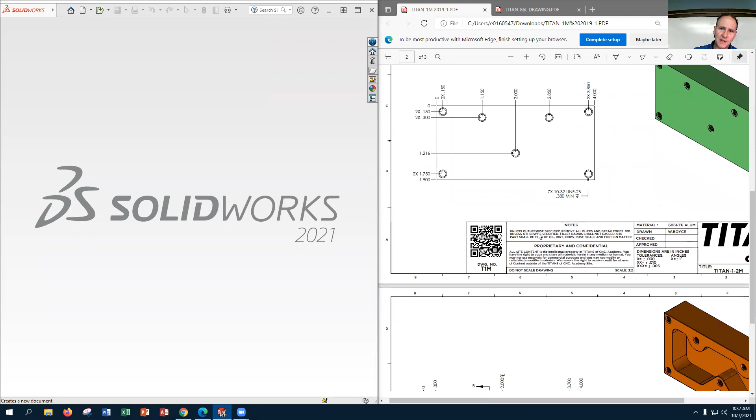Okay, this video is to demonstrate the Titan 1M milled part. There's a 3-page PDF here that we need to go through in order to complete the part. And what we'll do is we'll start with an inch part. Make sure you're in ANSI units. If you're not, you can always go up to the gear wheel here in options, document properties, and make sure everything is set to ANSI.

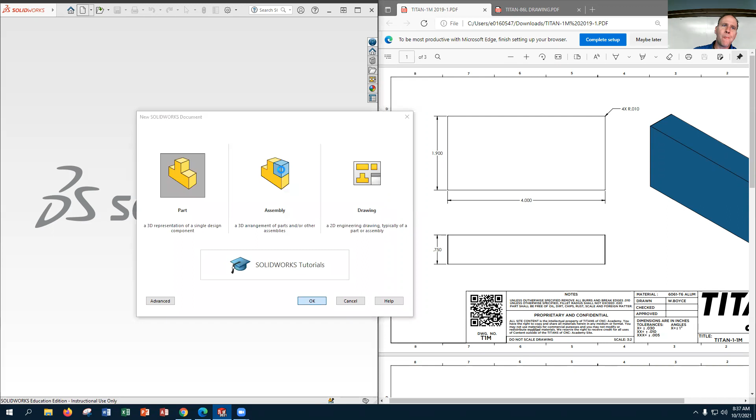So I'm going to open up a part, verify the units are in inches. Down here in the bottom, we've got inches. And looking at this part, isometric view, it looks like they chose a view that was started on the front plane. And before I do that, I'm going to set the material so I don't forget. So I see here in the title block, they have here

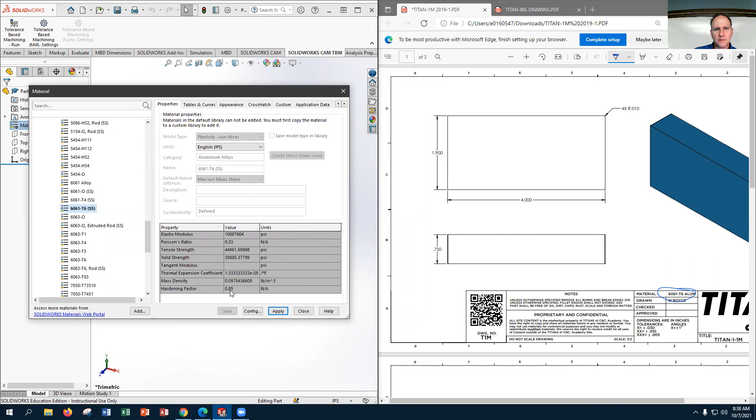6061 aluminum. So we'll go to our aluminum alloys, right clicking on material, going into edit materials. Now we'll scroll down here to 6061 T6. And the SS is just a bonus for us. So we'll say apply, close, and we can get started.

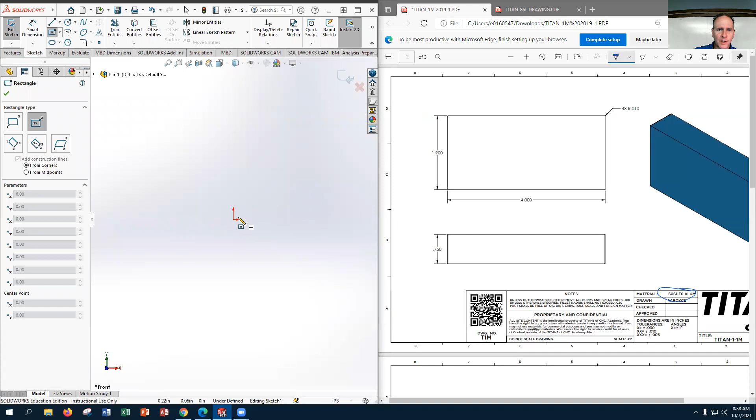We'll start on that front plane. And not caring where the origin is, other than it probably would be at a corner or in the center. It might be helpful to put it in the center. So I'll choose a center rectangle up here, right there. And we'll just sketch a rectangle starting on the center, right on the origin. That way we're set up for that. Put our 4 by 1.9.

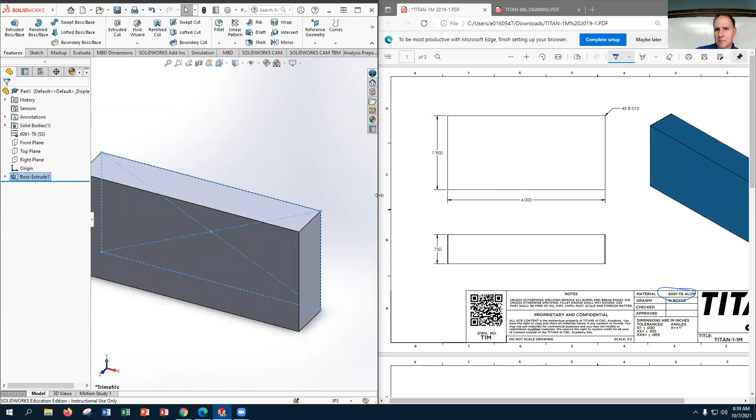I'm going to ignore that fillet until last, the R.010, because it's usually best to do fillets last on most models. So not only last, but we usually do them largest to smallest. Scrolling down, we can see basically we're talking about just all the tapped holes here. And we know they're tapped because this little note right here, it's a number 10, 32 threads per inch tapped hole. There are 7 of them. This just means that they're fine thread, and this means that they're internal threads. But it does say the depth here is .380 deep.

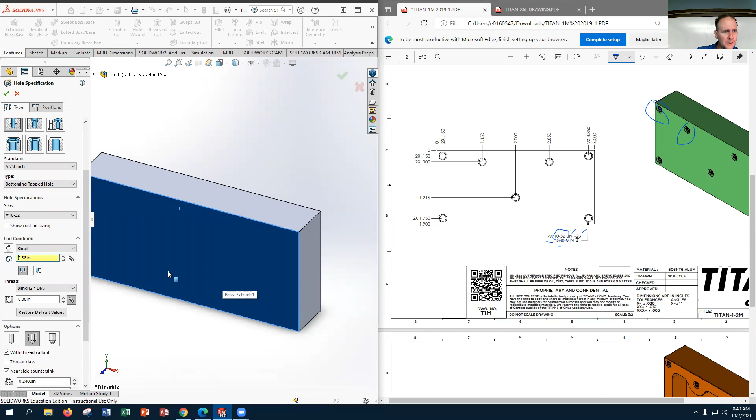So we're going to go ahead and pick this face first, go to Hole Wizard. If you ever don't choose the face first, make sure when you're in Hole Wizard, you do not pick the button that says 3D Sketch. This is our tap button in Hole Wizard once we're here. And we're going to go to a tapped hole. Bottoming is fine, but we're going to go down to 10-32. Find that in our inch style. This is not through all. This is blind to a depth of, and this is for our thread depth, 0.38. And that should update. If we link in condition .38 for thread, yes, thread .38.

Okay, so we can hit positions tab. I'm going to go ahead and try to make ourselves normal to this. I usually use the space bar to do this, but then I'm just going to plink each of these out here roughly in their locations that they go. We'll fix them up in just a minute here. So we want some horizontal and vertical relations between these so that when I pick like these two, holding control and selecting them both, going to horizontal, they are going to stay horizontal with one another. Then I want to make like these two vertical and just kind of go around the bend here, do another horizontal and do one more vertical. This will help us require less dimensions.

So now I can put in some of the dimensions in just a minute, but I've got these two horizontal and this one needs to be vertical to that. Okay. All right. So one thing we can do now is go into our dimensioning, and as you notice, they did ordinate dimensioning. So I'll do the same thing. I'm going to do the verticals first. First thing I'm going to do is pull a 0 here and pick, and I've got all those set down, and I'm going to hit the check mark, and you'll notice that I missed one here. I did that intentionally, but I'm going to fix that in a minute. Just want to show you how to add one into our dimension set when we're done. Let me just double click each of these and set them to the correct values.

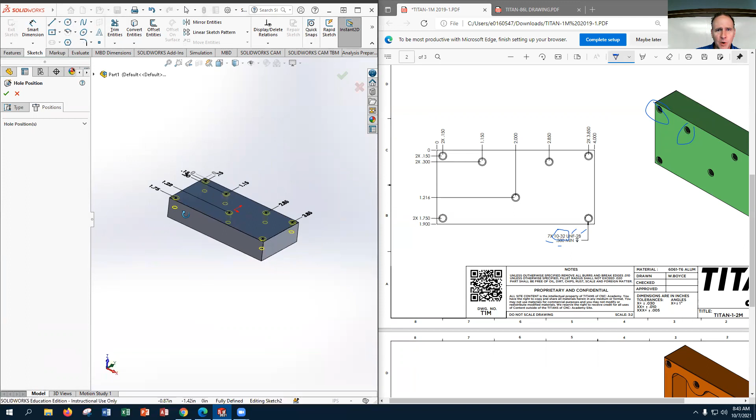Oh, that one's not needed. So I'm going to say cancel to it because it's already aligned to the origin. I had already put that in. Okay, so now I'm just going to double click each of these and set their sizes. And I'm just 1.15 and I hit the enter key. And over here 2.85, enter key, 3.85, enter key. And that's all done. So those are ready. There's our holes that are set up in this step.

And we'll hit the check mark and we can move on to the pocket creation down here, where we're going to do the internal pocket, this area here. And we're going to do the outside pocket, this area here. I'm going to do them in separate steps. So I'll pick this face again, start a sketch, get normal to that, and start to work on this pocket.

So the easiest thing I see about this shape is that, if you kind of look at it, there's a rectangle that's happening here with some changes to it, but basically it's offset of our outer perimeter. So if you just look at these two numbers, these are our offset numbers, 0.30. Easiest way to do that is pick that face while you're in the sketch and say offset and reverse it to the inside and then set the dimension to 0.3.

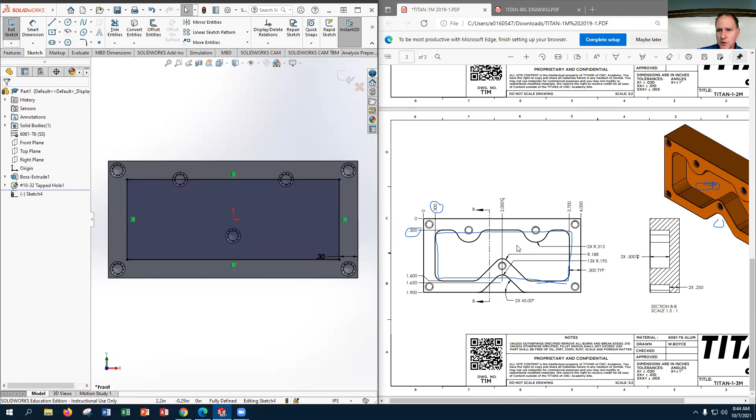Nice thing about this now is that we've got some of our construction already begun. We've basically got that and we've just got to add these bump outs. So I'll put a bump out here that looks sort of like this, and I'm going to do a tangent arc around the edge and back down. There's one of the bump outs, and I'm going to trim that with my power trim. And I'm going to do the other bump out. So the way I'm going to do that is just strike a circle from here to here, here to here. Pick these two, make them equal.

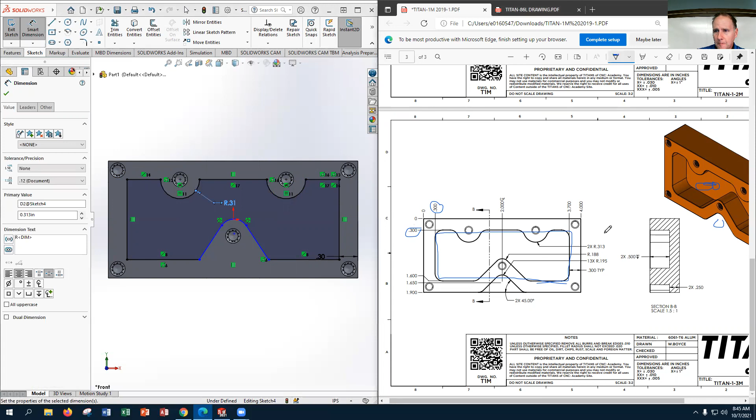I'm going to set a dimension for those then. Those are, well, those are radius. So let's trim first. That'll make it a little bit easier. Trim, trim, trim, trim. And we're going to go into our radius command. These are 0.313 I'm seeing over here. See where we got that from. Here. Okay, and then I see the 188 is also over there, so we'll set that on here.

Gets us closer. Notice our center fell off the map a little bit, so we're going to take him and align him vertically. And then we're going to put in a dimension to hopefully control the location on that. I think that it should be simple, but I'll just make these two lines equal. That'll help. And then we're going to make this angle by choosing that line and then this line, 45. So since they're equal, they're both 45.

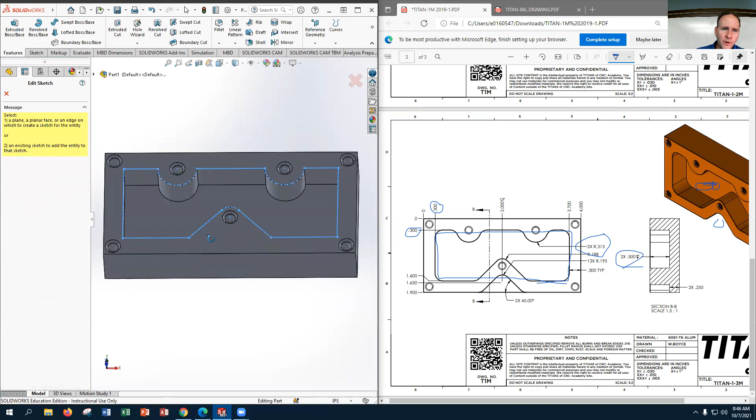And then this particular center point is controlled by just being on the center of that circle. And then everything's black. And that's perfect. That's what I wanted to get to. And we can cut this. And this cut is exactly a ½ inch deep as shown over there. There we go. Now I'm going to do the outside pocket, picking this face here, starting a new sketch.

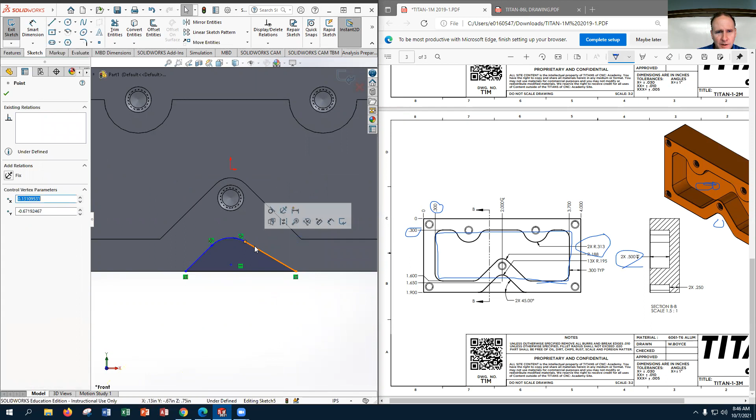This is basically a line, a curve, a tangent arc, another line, back down here, and across. Got a tangent on each of these intersections, so that's good. The size of this arc is going to be important, and that these two lines are equal is going to be important. They're equal, and they also need to be tangent to their partners out this way. So I'm going to set parallel, sorry. Set those to parallel. Make this one parallel. And then we'll set that size. This is 195, looking at the print over there. That dimension, and then we dimension the center from here all the way up to here, 1.65.

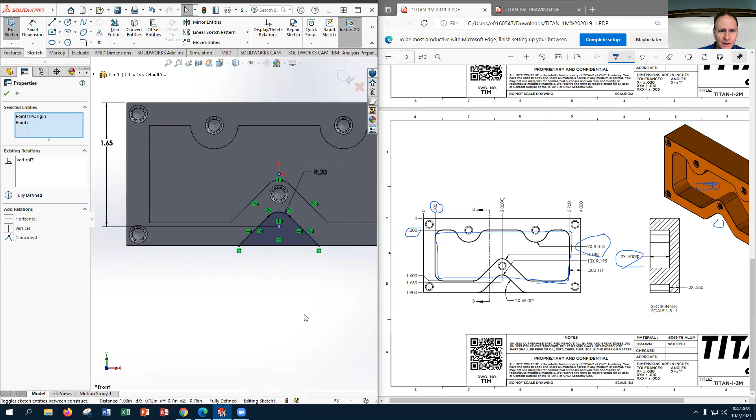Okay, why are we still blue? So we'll ask the question. So we grab onto something and drag it, and that answers it. We do not have a vertical relation set yet to anything that controls it. We can now cut. And this goes down to the same depth, a 1/2 inch. So let's say check. Basically, we have fillets left here at this point, a whole bunch of them. And these fillets are part of this set right here, this 13 by 195. That means all of these inside here are going to be that size.

So I'm going to go put that number in there, the 195, go fillet command, pick this one, see what it says if I go around. Oh, good. It wants to grab all those. That's nice. So the little pop-up menu allowed me to pick all these quickly. I didn't have to do that myself. I see there's 2 extras I want to add here. There's this one. This one. It should be 12 total to go with the other one I earlier had. And I'll say full preview.

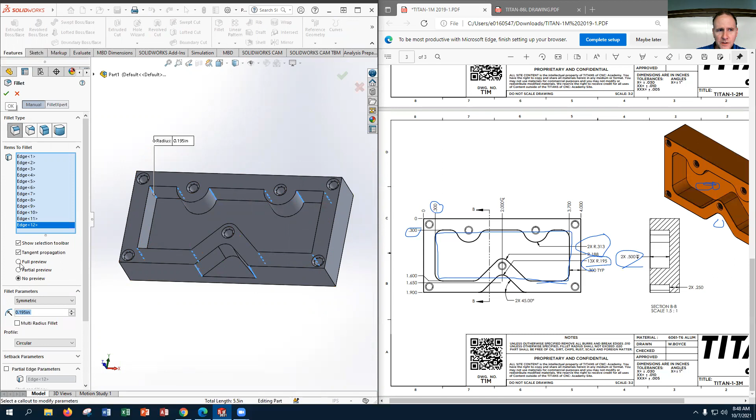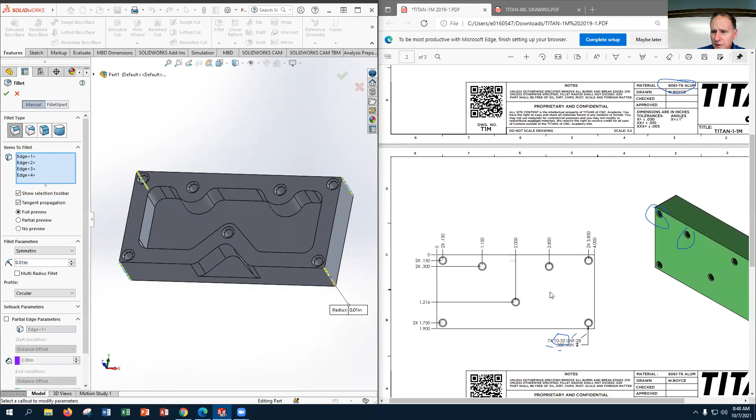Check. And the other 2 that we needed to add from the beginning, maybe we could do that now, the 0.01. So we'll do the fillet. We'll put in that number. We'll go right here. I'm also going to check to see if they want to provide the others. Yep. And if you look close, it's not really described in the dimensions, but they hit these edges here. So they hit this one and let it chase all the way around. And they hit this one and let it chase all the way around. Each of these top edges here.

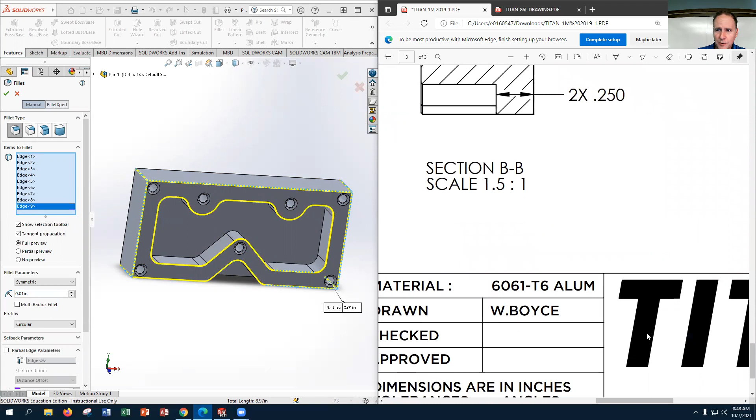And there's even one, if you look back at the first model, I think you can see there's one down on this edge, which is odd, but it's there. So I'll just put it on. Check. And that should be it. There's our part. I think that we've got her completed. Hope that helps.